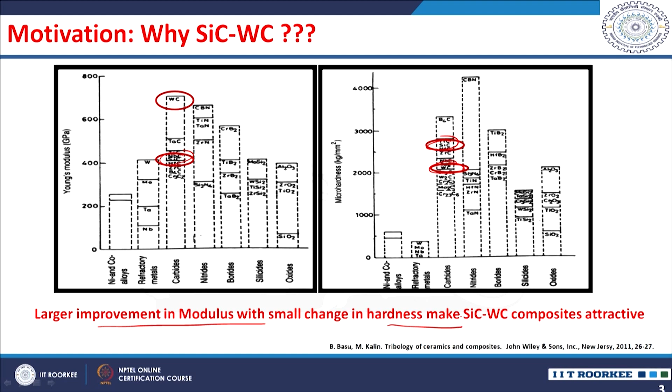As explained in an earlier lecture, silicon carbide is a ceramic material having a superior combination of properties, but these properties can be further improved by reinforcing with another phase. Among silicon carbide based ceramic composites, the Young's modulus of tungsten carbide is much higher than silicon carbide, whereas its hardness is slightly lesser than silicon carbide's hardness. So, if you have a silicon carbide tungsten carbide composite, we can expect an improvement in modulus with a small change in hardness. Such a composite will be attractive for several tribological applications.

However, our literature study indicates that such a material has not been studied for tribological behavior. Particularly, silicon carbide has higher hardness and oxidation resistance, whereas tungsten carbide has better strength and fracture toughness. So, the silicon carbide tungsten carbide composite is expected to exhibit improved properties under wear conditions.

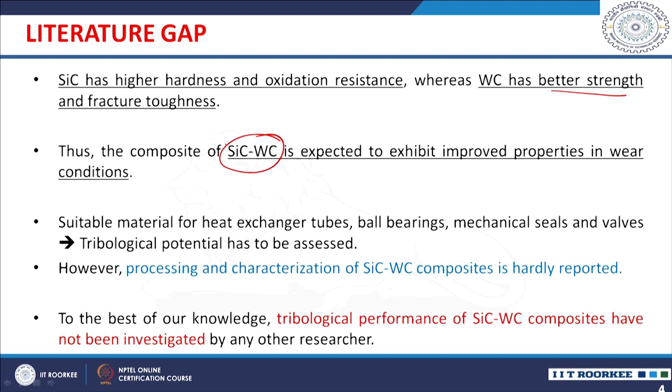However, the processing and characterization of dense silicon carbide tungsten carbide composites is a difficult task, so very few studies are reported for these composites. Particularly, dense silicon carbide tungsten carbide composite preparation is not yet reported, and the tribological performance of dense silicon carbide tungsten carbide composites has not been investigated by any other researchers.

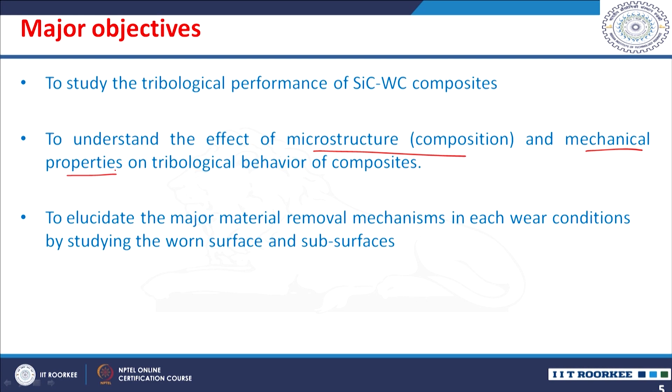In this context, the major objectives of the present study discussed in today's class are to study the tribological performance of silicon carbide tungsten carbide composites, to understand the effect of microstructure by changing the composition and mechanical properties on the tribological behavior of these composites, and particularly to elucidate the major wear mechanisms in wear conditions by studying the worn surfaces and subsurfaces.

These silicon carbide tungsten carbide composites were prepared at the University of Seoul with support from Professor Youngwook Kim. Four composites were selected for the present study, with varying tungsten carbide content from 0 to 50%: that is, 0, 10, 30, and 50% tungsten carbide containing silicon carbide ceramic composites, prepared with beta silicon carbide with a small amount of alpha silicon carbide, and aluminum oxide, yttrium oxide, calcium oxide as additive systems.

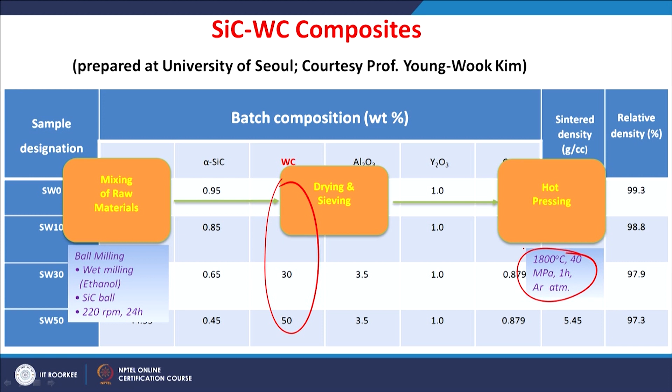These were prepared by hot pressing. Before hot pressing, the batch powders were mixed, dried, and sieved, followed by hot pressing at 1800 Celsius and 40 MPa for 1 hour in argon atmosphere. The sintered density of these materials is 98 to 99%.

The microstructure of these sintered silicon carbide composites exhibits almost equiaxed grains of silicon carbide, with very little presence of elongated grains. These almost equiaxed SiC grains decrease in size from around 830 to 550 nanometers with increasing tungsten carbide content from 0 to 50%.

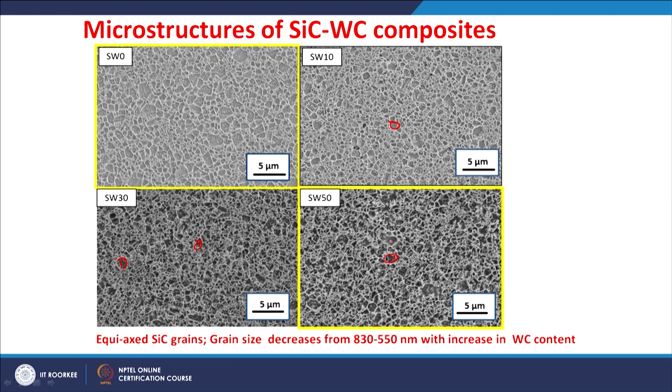With respect to tungsten carbide content, we see uniformly distributed tungsten carbide particles in the silicon carbide matrix, though certain agglomeration is present with larger amounts of tungsten carbide. The SiC with 50% tungsten carbide composite shows agglomerations of these tungsten carbide particles.

The mechanical properties were studied for these composites. Hardness increases up to 30% tungsten carbide, but slightly decreases at 50%, whereas fracture toughness improves from 5.85 MPa root meter to around 6.66 MPa root meter.

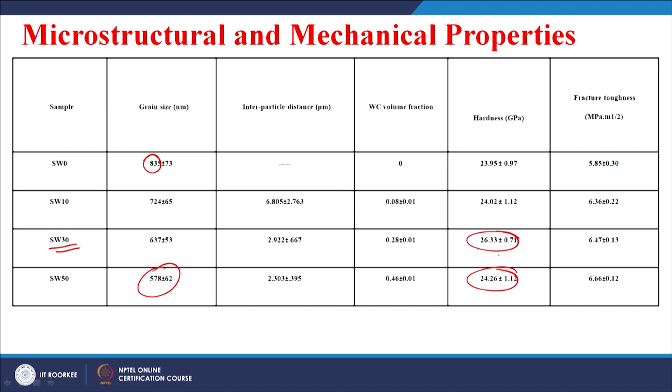Looking at the correlation between microstructural characteristics and mechanical properties, grain size decreased from 835 nanometers to 578 nanometers with increasing tungsten carbide content. Interparticle distance also decreased with larger amounts of tungsten carbide in these composites, indicating that grain growth during sintering was restricted by the presence of larger tungsten carbide content. This was reflected in the properties: hardness showed an increase for the silicon carbide 30% tungsten carbide composite, and fracture toughness continuously increased from 5.85 to 6.66 MPa root meter. This fracture toughness improvement is very important for any structural applications, so it needs to be studied.

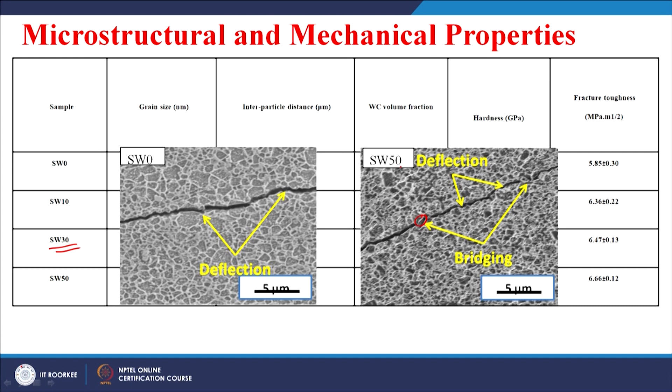After Vickers indentation, cracks propagate at the edges of the indents. When no tungsten carbide was added, the crack deflections are minimal, whereas the deflection and bridging are improved when tungsten carbide particles are present. These tungsten carbide particles improve the fracture toughness through bridging or deflection of the cracks.

With this material introduced, the tribological performance is systematically studied under two different sliding wear conditions: a unidirectional sliding wear study and a reciprocatory sliding study. In the unidirectional study, the counterbody influence on tungsten carbide content was particularly studied, whereas in the reciprocatory conditions, the temperature of the sliding test and the tungsten carbide content were particularly studied.

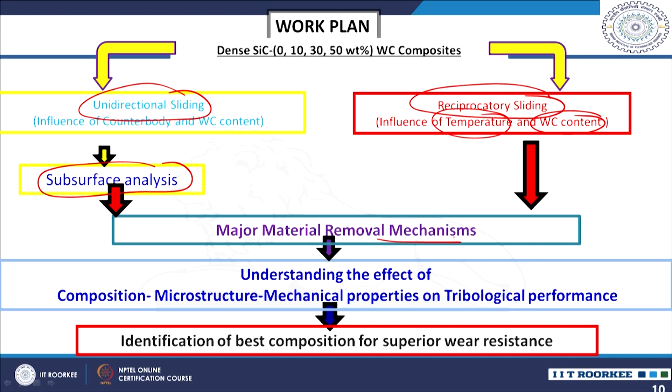In addition to the sliding wear behavior in unidirectional testing, major focus is given to subsurface analysis to find the origin of the material removal mechanisms. The major aim of this study is to elucidate the material removal mechanisms, so we can understand the relation between the composition of the composite—that is, tungsten carbide content variation—and how it reflects into microstructure, and how the microstructure influences mechanical properties and tribological performance. The study aims to understand the effect of composition or microstructure on mechanical and tribological behavior, and to identify the best composition for superior wear resistance.

Let us go through the salient results obtained in the unidirectional sliding wear studies.

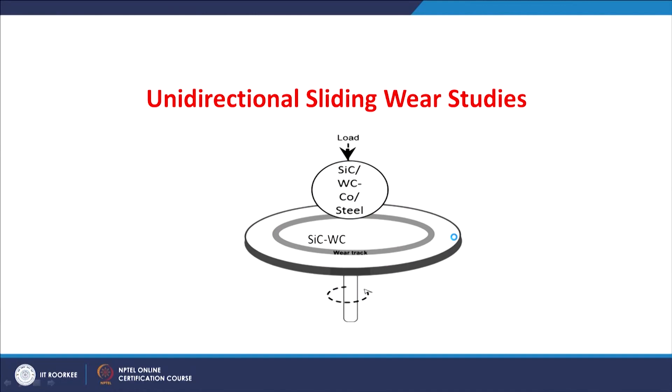Three different counterbodies were used: silicon carbide ceramic, tungsten carbide cobalt (called a CERMET), and steel. Three loads—5, 10, and 20 Newton—were applied with a combination of other parameters kept constant. For this, the ball-on-disc tribometer was used.

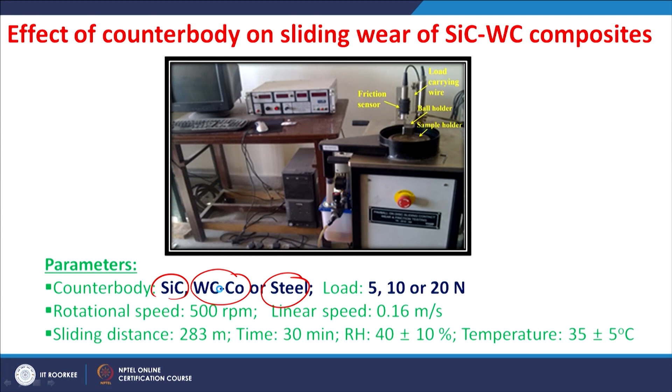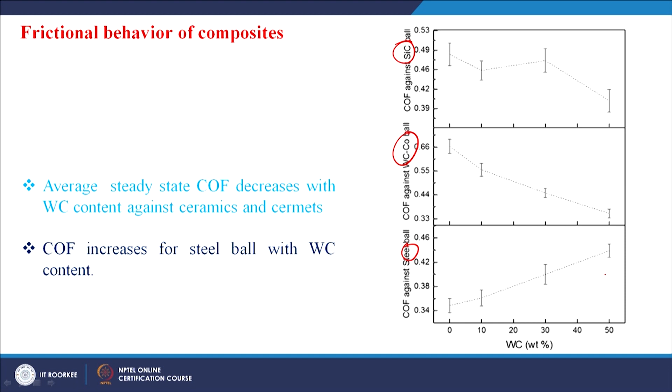The disc is the specimen, which is the silicon carbide-tungsten carbide composite, whereas the ball is changed from silicon carbide to tungsten carbide cobalt or to steel. Friction was measured and the wear was determined. The average coefficient of friction decreases against silicon carbide or tungsten carbide cobalt balls, whereas against steel it actually increases because the surface is changed at the contact. So there is a friction behavioral change.

Let us understand it further. When the wear volume was measured, as explained in the previous class, profilometry was used to read the surface profiles in a 2-dimensional way, and over a particular slide distance this was integrated to determine the wear volume.

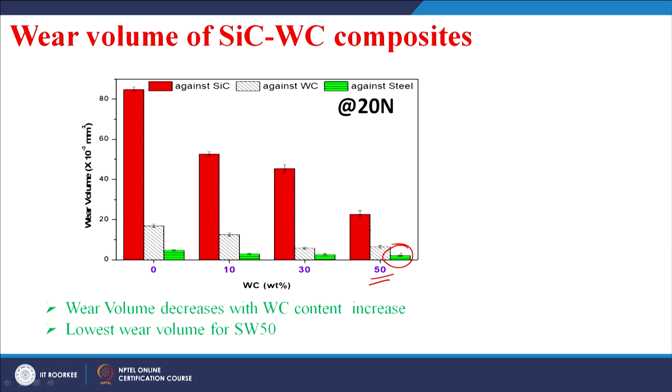You can see the wear volume of these composites having 0, 10, 30, and 50 weight% tungsten carbide content, tested against silicon carbide, against tungsten carbide cobalt, and against steel. The wear volume decreased with tungsten carbide content for any composite against any counterbody, with the lowest wear observed for the SW50 composite. Regarding the effect of counterbody, wear volume was highest against the silicon carbide ball and lowest against the steel ball, with tungsten carbide cobalt data falling in between.

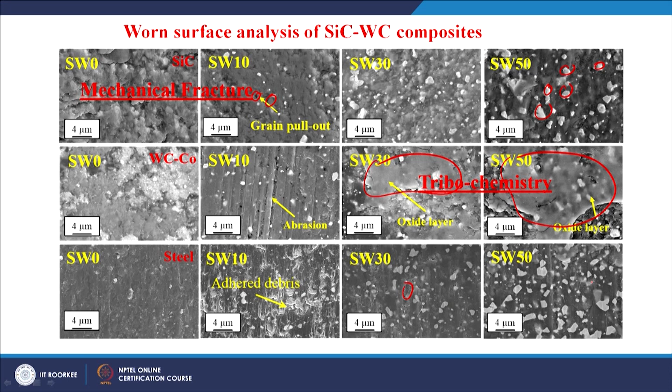As the tungsten carbide content is increased, you can see the presence of a particular layer. This layer dominantly covers the surface, particularly when you have the highest tungsten carbide content. But when you see the composite worn surfaces which were worn against steel, again they show debris and fracture and removal of these tungsten carbide particles. So there is a change from mechanical fracture to tribochemistry when there is a change in the tungsten carbide content or a change in the counter body.

To summarize the wear mechanisms against different counter bodies as a function of tungsten carbide content: abrasion and polishing is observed when you do not have any tungsten carbide content and worn against steel. When the tungsten carbide content is increased, you have adhered debris entrapped inside the grooves, and against tungsten carbide cobalt, this becomes severe abrasion with increased tungsten carbide content. But as the content is further increased to 30 or 50 weight percent, you see a compacted layer which adheres to the surface.

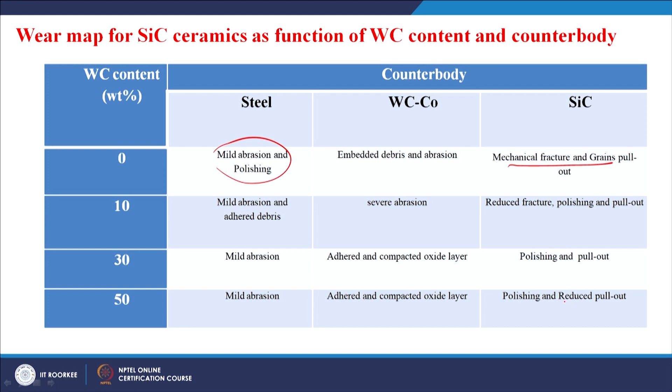Against silicon carbide, there is only grain pull out and fracture; only a change in the fracture is observed with increase in tungsten carbide. With an increase in tungsten carbide content, the fracture is reduced, it becomes more polished, and there is reduced pull out. To understand the actual mechanisms, we need to also study the counter body worn surfaces.

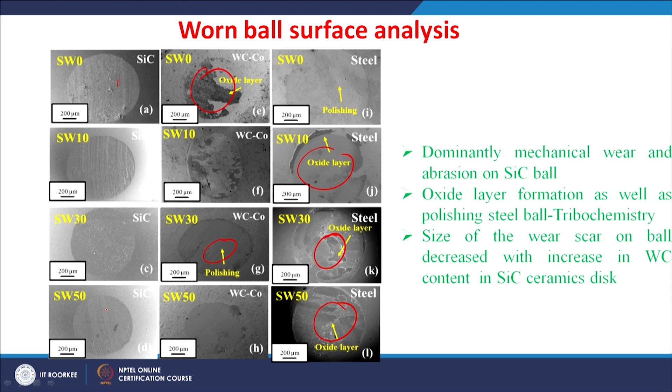Whereas oxide layer formation as well as polishing is observed against tungsten carbide or on the balls of tungsten carbide or steel. So the ball surface analysis shows the presence of tribochemistry on the tungsten carbide cobalt balls or the steel balls, whereas the silicon carbide balls do not show any tribochemistry. It is simply fracture, abrasion, and removal of material by fracture.

So in order to understand the chemistry difference on the surface against different counter bodies, Raman analysis was done, and it shows different products formed as debris. The debris against silicon carbide shows oxides of silicon carbide, oxides of silicon, and tungsten oxide. Generally when the harder counter body is sliding over the disc surface because of the harder indenting points...

So the material is removed and then subjected to oxidation in normal ambient conditions of sliding. You can see certain oxides also forming against tungsten carbide cobalt, including tungsten oxide, silicon oxide, and cobalt tungsten oxide debris. Against steel, in addition to these oxides, we also see oxides of iron and iron tungsten oxide.

So it indicates there is a chemistry difference in the debris formed when these composites were subjected to sliding against different counter bodies. The friction is more when these were worn against steel because of the presence of the harder oxides of iron or iron tungsten oxide, and these iron tungsten oxides are not present in the other conditions, so you do not have such an increase in friction.

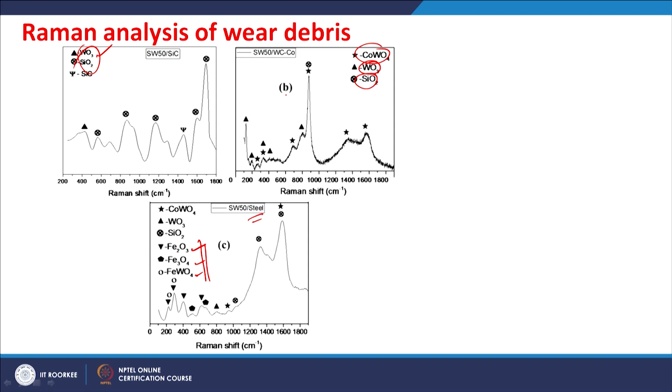Summarizing the silicon carbide ceramics: when you do not have any tungsten carbide, they just fracture by intergranular mode. This is the same against silicon carbide, tungsten carbide cobalt, or steel ball, with larger grains coming out as debris. When the silicon carbide contains some tungsten carbide particles, the composite shows a decrease in grain size, so the debris is also smaller. The fracture mode changes dominantly from intergranular to transgranular when you have tungsten carbide particles in a silicon carbide ceramic.

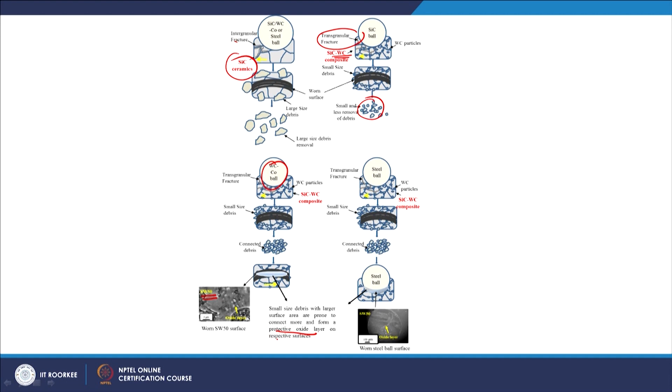Now, if you see the effect of the counter body against a tungsten carbide cobalt ball, these composites again fracture by the transgranular mode, but because of the finer size of the debris, and with the increase in tungsten carbide content in the composite, particularly SW50 or SW30, these smaller debris with a larger surface area are more prone to connect and form a protective oxide layer. So you get a decrease in wear.

In case of the steel ball, these composites again fracture by the transgranular mode, and the smaller sized debris connect with each other and form a layer, which is actually observed on the ball surface.

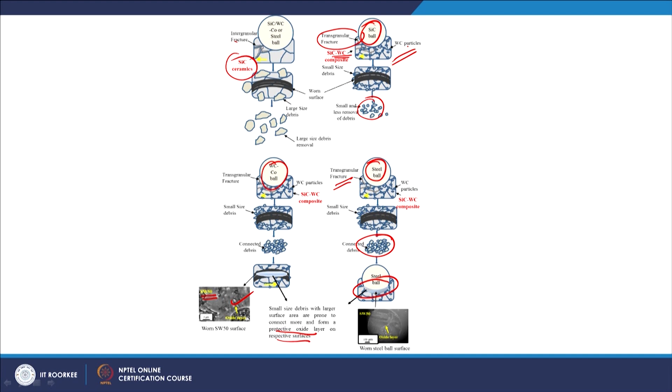The layer is observed either on the ball surface of the steel or on the disc which was worn against the tungsten carbide cobalt. They show certain layers, whereas such a layer is not observed when these composites were worn against silicon carbide. Against silicon carbide, it is purely fracture—the material is removed only by mechanical fracture and the resultant grain pull out.

So the major results from the unidirectional sliding wear study are like this. The coefficient of friction depends on the counterpart materials irrespective of their ball hardness. With increase in tungsten carbide content in silicon carbide ceramics, the coefficient of friction against steel ball increases, whereas it decreased for other silicon carbide or tungsten carbide cobalt ball.

Wear volume decreased with increase in tungsten carbide content, and the silicon carbide with 50% tungsten carbide composite exhibited minimum wear against any counterbody.

Regarding the major mechanism of material removal, against silicon carbide ball the silicon carbide tungsten carbide composites are worn by purely mechanical fracture with micro cracking, whereas tribochemical wear is dominating for the composites worn against tungsten carbide cobalt or steel ball. So there is a difference in the mechanism of material removal, and a difference in the friction and the wear.

This indicated very important information: when the silicon carbide tungsten carbide composites were subjected to different counterbodies, we have a different wear mechanism dominating. So that results into the performance difference.

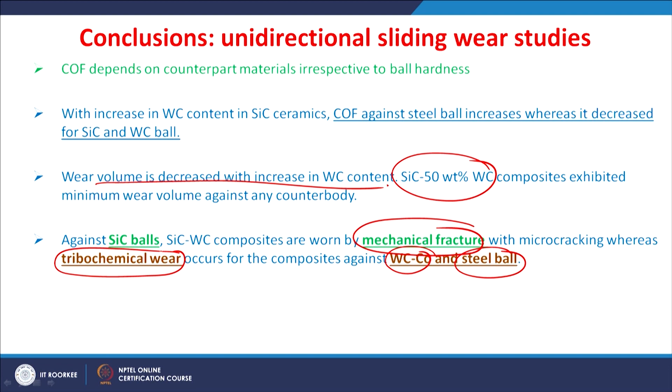Amongst the three counterbodies, when we use the silicon carbide counterbody, purely mechanical fracture is dominating. So it is very important to understand the origin of such a mechanical fracture.

So we selected these silicon carbide tungsten carbide composites worn against silicon carbide ball only, where there is dominantly mechanical fracture, for further studies of the subsurface analysis. The subsurface analysis study is very important to identify the origin of such a fracture.

So we purposefully did not take these silicon carbide tungsten carbide composites sliding wear studies against the tungsten carbide and steel ball, where there was a different type of tribochemistry.

So these subsurface analysis studies were possible with the support from Professor Amartya Mukhopadhyay of IIT Bombay.

We can see here the subsurface analysis was done by using a combination of focused ion beam with TEM analysis. Sample was cut at an angle of 35 degrees using a focused ion beam to observe the subsurface.

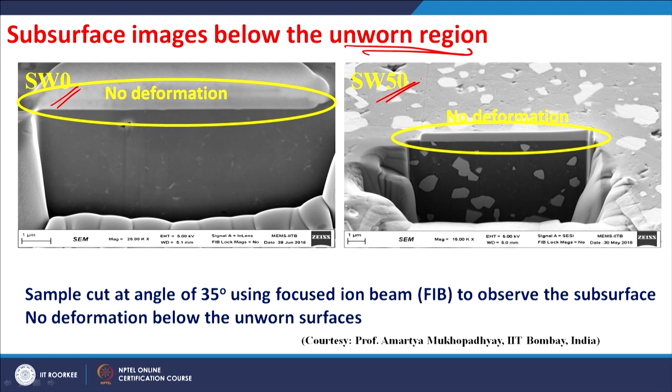The unworn regions of the sample do not show any deformation, whether it is silicon carbide without tungsten carbide or with tungsten carbide. There is no signature for any deformation, whereas when these composites were worn, you can see a lot of difference in the subsurface regions. When it is only silicon carbide, the damaged zone is around 1 micrometer; in case of composite, it is only 300 nanometers.

So there is a resistance against the damage at the subsurface when you go for the composite. In addition to that, we can also see several cracking signatures here.

Generally these ceramics show median and lateral cracks beneath the worn surfaces. It follows the classical linear fracture mechanics—when the hard and sharper contact slides over a surface, particularly the brittle surface, median or lateral cracks are generally found.

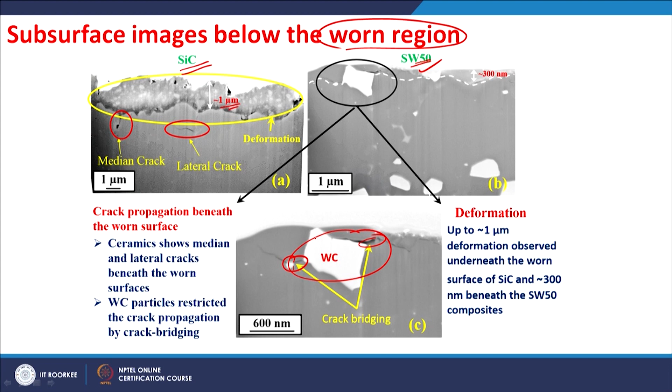But if you can see this difference between the subsurface images of the silicon carbide ceramic and the silicon carbide tungsten carbide composite, the tungsten carbide particles restricted the crack propagation by crack bridging. So this essentially shows there is a benefit when you go for a composite.

This can be illustrated schematically. The upper region generally has a plastically deformed region, and just below that you have a fracture region, characterized by cracking, whether median or lateral cracking.

When you have tungsten carbide particles, these particles result in crack bridging or crack deflection that improves the resistance against fracture. So you get lesser wear also.

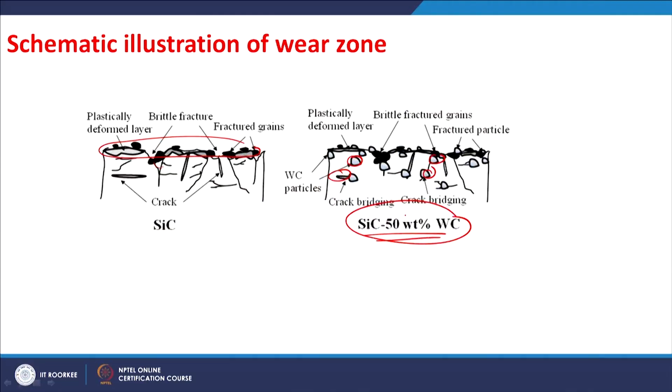So if you can recall, these silicon carbide tungsten carbide composites showed better wear resistance than the silicon carbide ceramic because of this resistance against crack propagation.

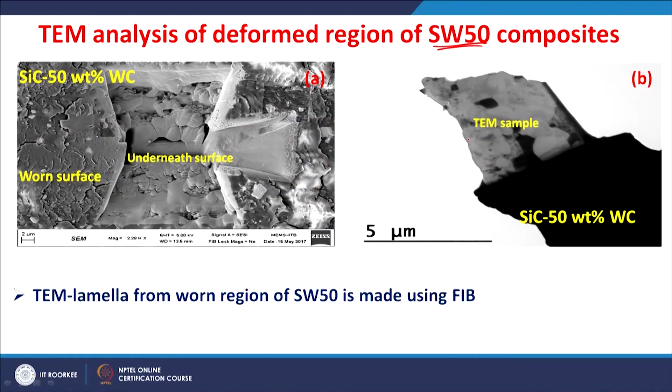To understand the origin of such behavior, TEM analysis was done on the deformed region of the selected composite. A TEM lamella was made from the worn region using the FIB, and this TEM sample was subjected to further investigation. This shows the silicon carbide grains and the tungsten carbide particles.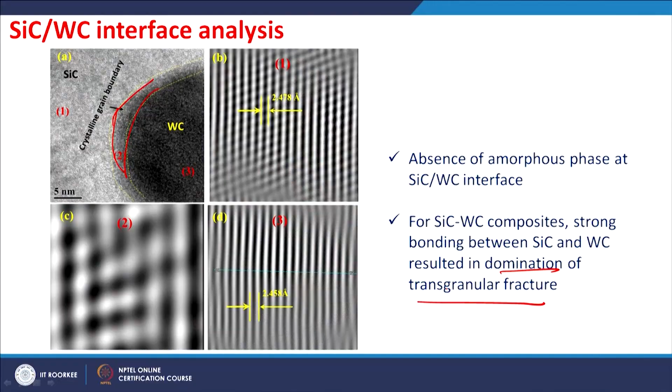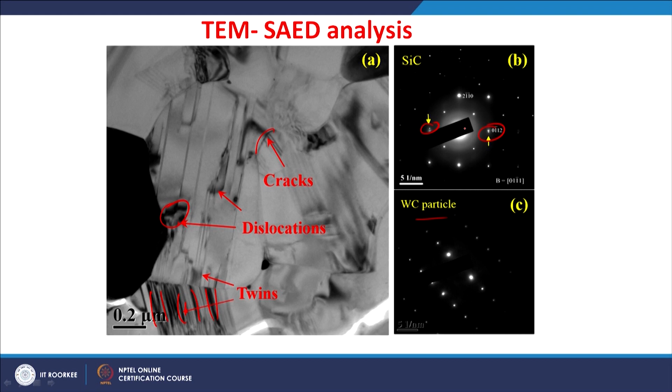Further, the selected area diffraction analysis also indicates the crystalline arrangement of the silicon carbide or these tungsten carbide particles. In addition, these worn regions, the regions underneath the worn surfaces, show the signatures of cracks as well as dislocations. In addition to these dislocations and cracks, we can also see lots of twins. The SAED pattern also indicates the presence of the twins. So the deformation is possible just below the worn region in terms of the dislocations as well as the twins.

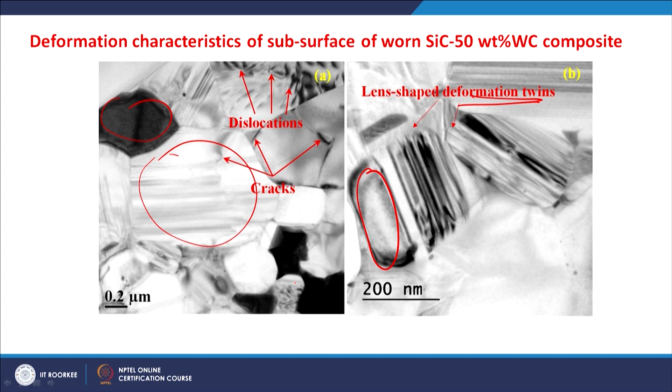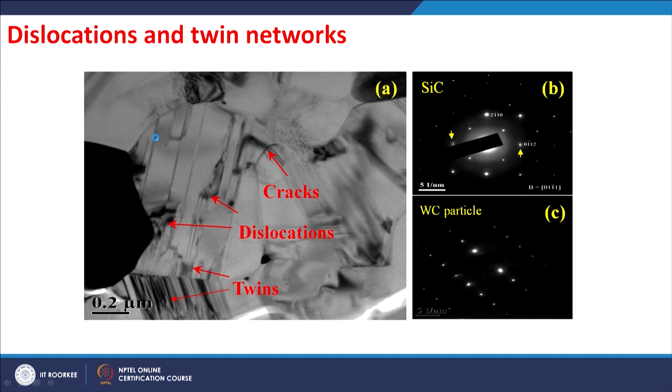As we know, silicon carbide ceramics have very few slip systems. It is quite possible the deformation happens by the formation of these twins. The shape of these twins indicates lens which indicate the deformation induced twins. So you can see on the grains of silicon carbide, the cracks and dislocations are present, whereas the dislocations do not present in the tungsten carbide or at the interface of this tungsten carbide with silicon carbide.

So concluding the subsurface study results, the deformation zones underneath the worn surface are larger for monolithic silicon carbide as compared to silicon carbide tungsten carbide composite. There are more or less 3 times more for the silicon carbide ceramics as compared to silicon carbide 50% tungsten carbide composite.

Micro cracks are observed below the worn region till 2 micrometer depth for monolithic silicon carbide ceramics. By contrast, the tungsten carbide grains are observed to bridge the cracks in case of silicon carbide tungsten carbide composite. The deformation zone underneath the worn region is comprised of a network of extensive dislocations and twins. So the stresses built at the tips of these dislocations or twins generate the micro cracks. You see lots of micro cracks in silicon carbide grains, whereas no deformation substructure is observed in the tungsten carbide grains, which also blocked the dislocations or twins at the interface. Therefore, the extent of deformation is limited to almost 1/3 what we observed here in case of the composite.

This particular study is very important in the sense that preparation of such a sample for TEM analysis, the sample must be taken from the region underneath the worn surface. So for that, FIB was used and then TEM analysis was done carefully, which revealed this information about the deformation zones, the cracking, as well as the beneficial effect of the tungsten carbide particles in the silicon carbide ceramics.

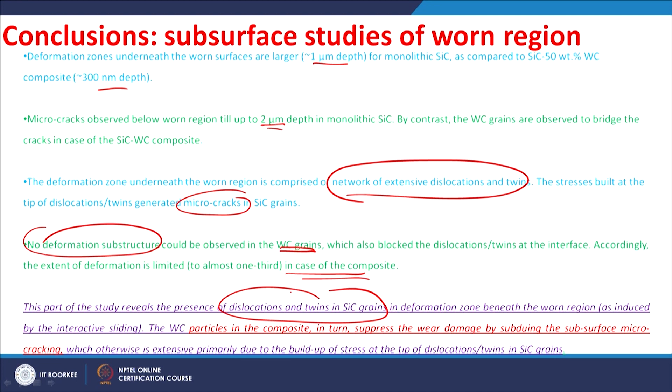So this particular study reveals the presence of dislocations or twins in the silicon carbide grains in the deformation zone beneath the worn region. The tungsten carbide particles in the composite in turn suppress the wear damage by subduing the subsurface micro cracking, which otherwise is found to be very extensive, mainly because of the buildup of stresses at the tips of these dislocations or twins in the silicon carbide grains.

So these stresses were developed because of the interactive sliding. The sliding induced stresses are responsible for the cracking. The cracking can be minimized when you use the tungsten carbide particles. That means a composite approach is very much beneficial in suppressing the wear damage by subduing the subsurface micro cracking.

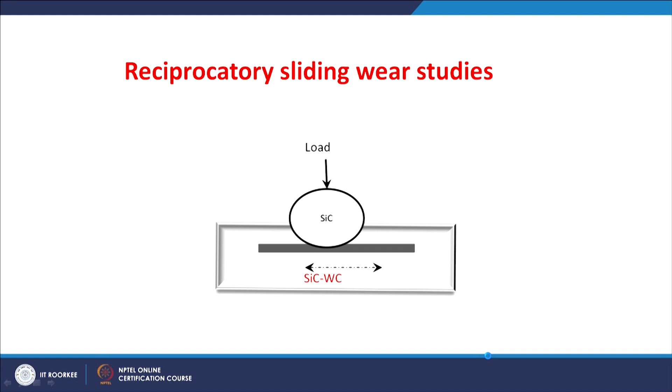Let us go to the last part of this lecture, the reciprocatory sliding wear studies. In order to understand the effect of the sliding mode from unidirectional to reciprocatory, we used a reciprocatory sliding wear test apparatus, where the ball was used as silicon carbide only and the load was changed from 6 to 19 Newton. These loads were selected to maintain similar levels of Hertzian stresses which were used in the unidirectional sliding test.

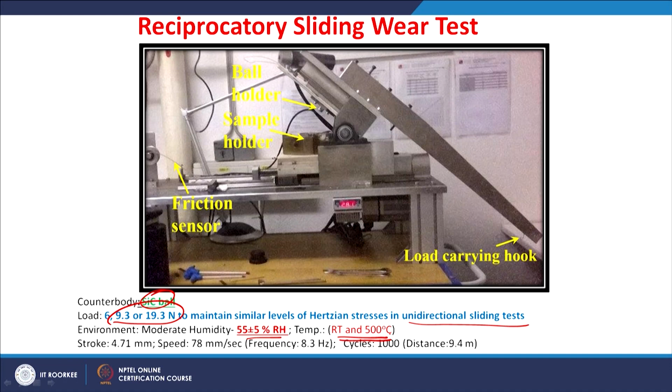So these were done in moderate humid conditions at two different temperatures, room temperature and 500 Celsius. So the major aim of this study is to understand the effect of the tungsten carbide content as well as the temperature of testing on the reciprocatory sliding wear behavior of the silicon carbide tungsten carbide composites.

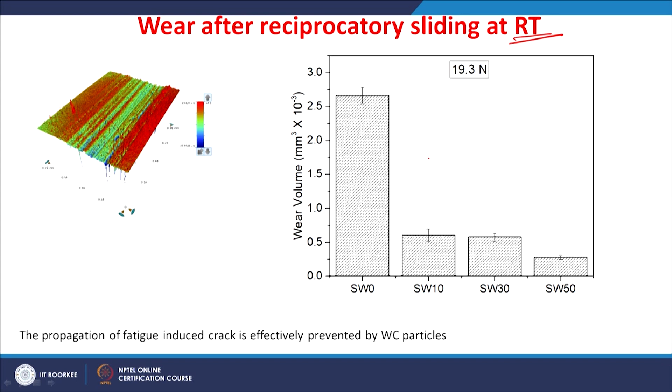Now you see the wear volume of the composites worn at room temperature. As tungsten carbide is introduced in the silicon carbide ceramics, the wear was substantially decreased. This means the reciprocatory sliding, which induces fatigue-induced cracks, is effectively prevented by the tungsten carbide particles. This study was selected to understand the behavior of these composites in reciprocatory sliding.

In reciprocatory sliding, we have a difference in the contact time of this debris, so it will affect the properties or performance. If you look at the silicon carbide tungsten carbide composites after sliding in reciprocatory mode at room temperature, the surfaces show micro cracks and pull-out of the tungsten carbide particles, but with increase in tungsten carbide content, the fracture was minimally reduced.

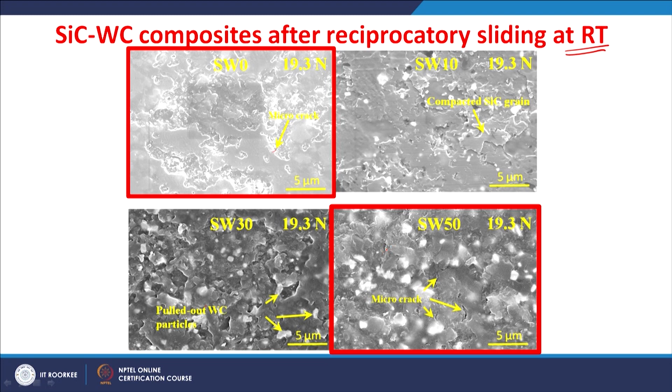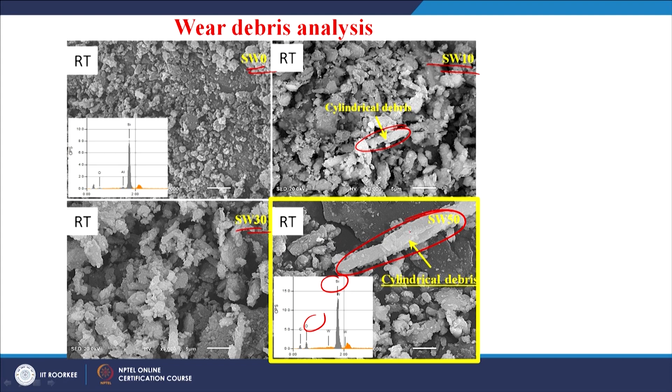The debris analysis particularly shows the presence of cylindrical shaped debris. EDS analysis shows these are oxides of silicon. As the tungsten carbide content increased, you get finer debris as well as the presence of cylindrical shaped debris.

This information is very important to analyze the unidirectional reciprocatory sliding wear test results. In case of silicon carbide ceramics without tungsten carbide, the wear rate was more or less the same whether unidirectional or reciprocatory, but as the tungsten carbide content is increased, you get a reduction in the wear rate in the reciprocatory sliding wear test. That indicates the effect of longer contact time for the finer debris particles.

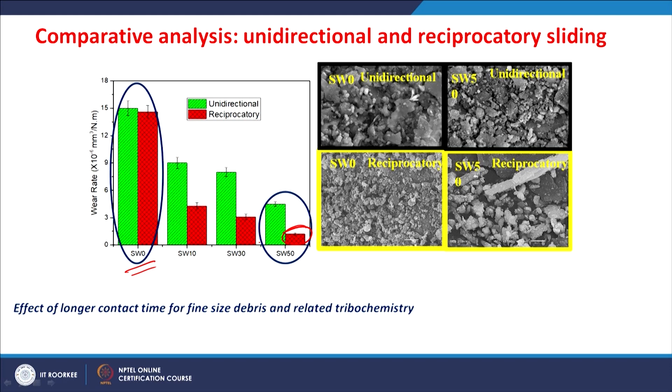These finer sized debris connect with each other and tend to form cylindrical debris. The cylindrical debris generally facilitates easy sliding, and forms only when there is a viscous surface. This viscous surface layer is because of the interaction with the silicon oxide present on the silicon carbide particles, or present due to these wear tests.

This silicon oxide reacts with moisture and forms silicon hydroxide. The silicon hydroxide particles connect with each other and form cylindrical debris. So the viscous surface is removed from the composite and the debris connect to each other and form a cylindrical shape.

There is a tribochemistry when the sliding test mode was changed from unidirectional to reciprocatory. In unidirectional it is mechanical fracture only, whereas in reciprocatory there is a signature of tribochemistry involved.

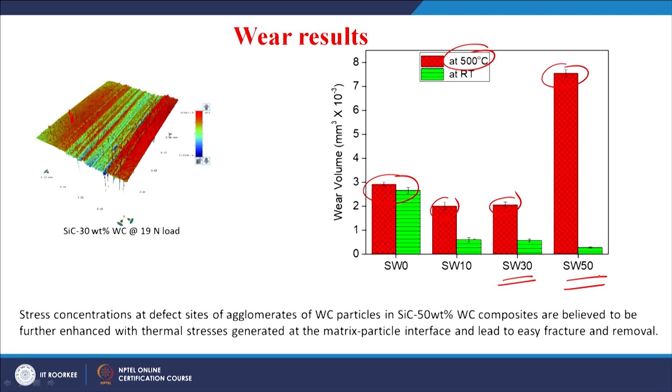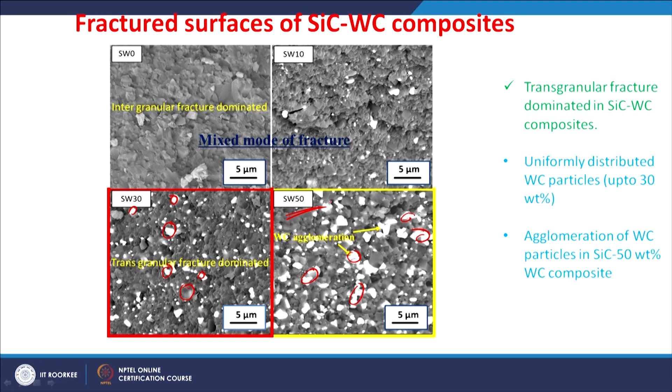The stress concentrations at the defect sites of these agglomerates of tungsten carbide particles, particularly in the SW50 composite, are believed to be further enhanced with thermal stresses generated at the interface of the matrix and particle. This leads to easy removal of material, so you get a larger wear volume when tungsten carbide was around 50%.

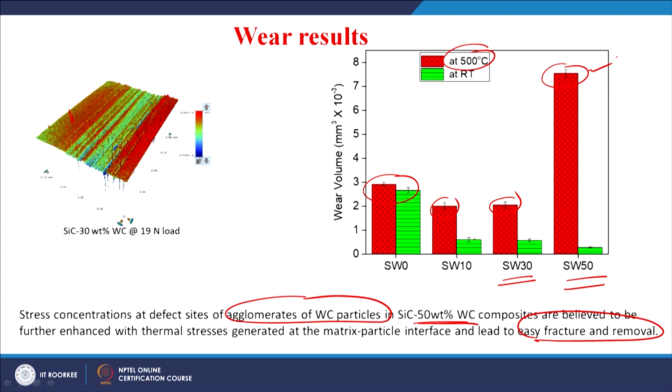The silicon carbide tungsten carbide composite surfaces after reciprocatory sliding at room temperature and high temperature of 500 Celsius show a difference in mechanism. The fracture is increased when testing was done at higher temperatures.

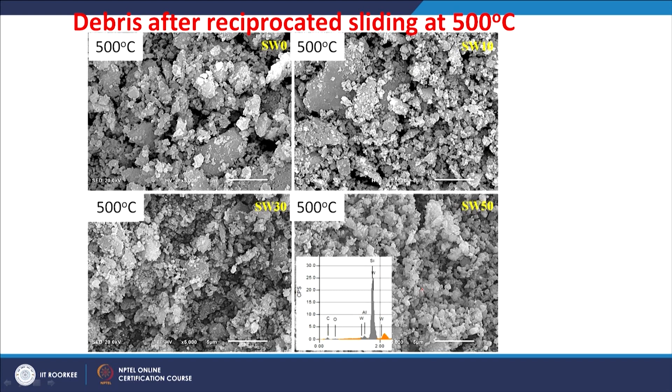At room temperature, as tungsten carbide content is increased, we see certain tribochemical layer formations and removal, whereas such tribochemical layer formations are not found in composites worn at high temperatures. The debris also show no presence of any cylindrical shaped debris - these are all fractured grains with no signatures of tribochemistry.

We also validated the experimentally measured wear volume with the wear volume determined using a lateral crack model. Since fracture dominated for the silicon carbide tungsten carbide composites at higher temperatures, the experimentally measured wear volume is in linear relation with the wear volume determined using the lateral crack model.

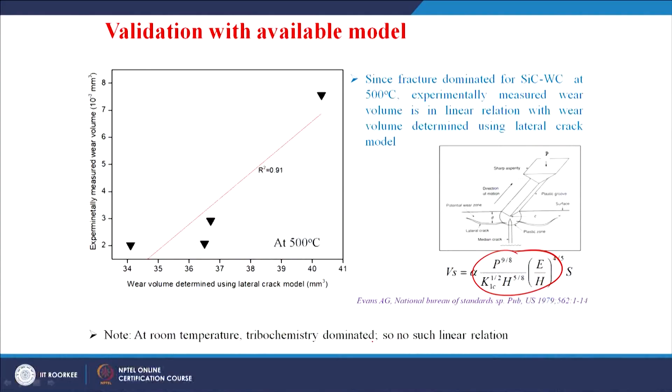But at room temperature, because tribochemistry was dominated, no such linear relation is observed. This also indicates mechanical fracture at higher temperatures, whereas tribochemical wear occurs at lower, room temperatures.

Concluding these results from the reciprocated sliding wear studies, increased tungsten carbide content resulted in reduction in friction and wear in ambient reciprocated sliding conditions, with the generation of cylindrical debris.

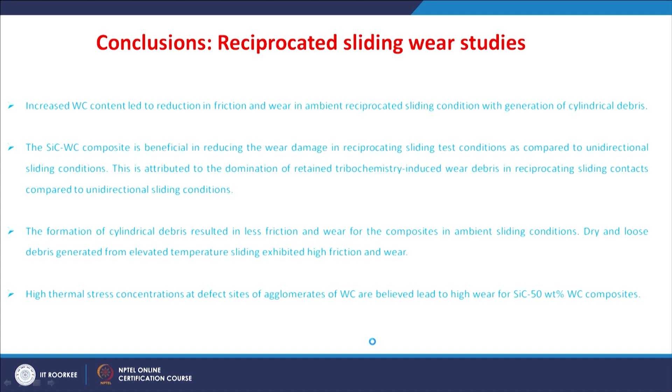So, cylindrical debris formation is observed only in the ambient conditions. The silicon carbide tungsten carbide composite is beneficial in reducing wear damage in reciprocated sliding test conditions as compared to the unidirectional sliding test conditions.

This observation is attributed to the domination of retained tribochemistry induced wear debris. Because of the longer time for the debris in contact, the tribochemistry induced wear is much retained, so in the reciprocated sliding conditions it is much more beneficial.

The formation of this cylindrical debris resulted in lesser friction and wear for the composites in ambient sliding conditions, whereas dry and loose debris generated from elevated temperature sliding conditions resulted in high friction and wear. High thermal stress concentration at the defect sites of the agglomerates of tungsten carbide particles are believed to lead to higher wear when there is a larger amount of tungsten carbide content.

So, this study indicates the influence of the sliding mode, the influence of the tungsten carbide content in the silicon carbide tungsten carbide composite, and the influence of the temperature.

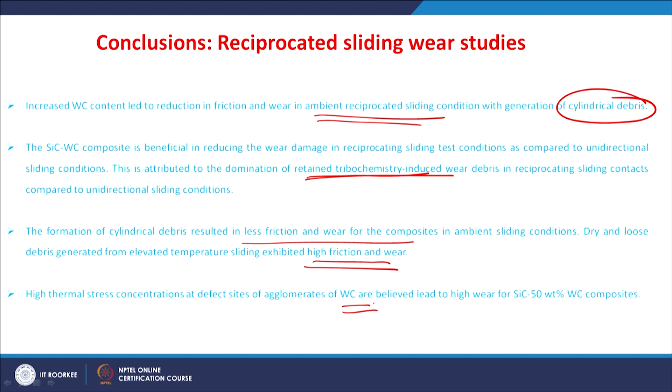With respect to tungsten carbide content, the silicon carbide tungsten carbide composite is always beneficial in reducing wear damage in reciprocatory sliding conditions, as the fatigue induced crack is deflected or bridged. So the removal of material by fracture is reduced, giving a benefit in the silicon carbide tungsten carbide composite.

So, finally summarizing, we have gone through the salient results obtained in the tribological study at different length scales for the silicon carbide tungsten carbide composites.

We found wear decreased when tungsten carbide content is increased in unidirectional sliding conditions as well as reciprocatory sliding conditions, whereas mechanical fracture is found against silicon carbide ceramic ball in unidirectional sliding conditions, and tribochemical wear dominates against tungsten carbide, cobalt, or steel ball.

In reciprocatory sliding conditions done with silicon carbide against silicon carbide ball only, they again showed enhanced tribochemistry. You can see the mechanical fracture against silicon carbide in unidirectional conditions changed to tribochemical induced wear at room temperature for these composites, whereas at higher temperatures again the mechanical fracture is dominant.

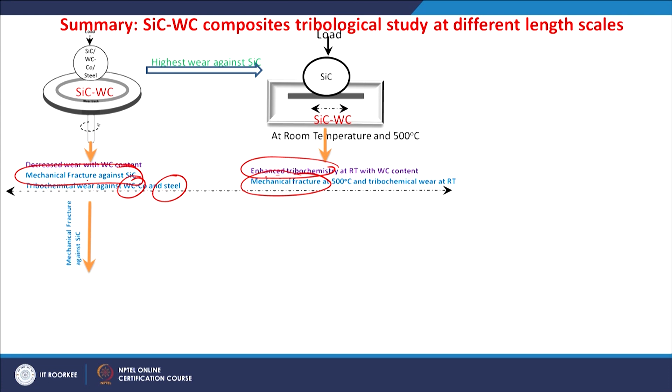In order to understand the origin of material removal, we selected the silicon carbide tungsten carbide composites for study in subsurface regions. We selected the composites worn against silicon carbide only, because it is only mechanical fracture, there is no tribochemical layer, so it is easy to understand the origin of material removal from beneath the region.

So, subsurface study indicates the plastically deformed region as well as the cracked region, and the presence of tungsten carbide is always beneficial in reducing wear by crack bridging and crack deflection, so that the fracture is reduced and the wear is reduced.

Beneath the worn region, the silicon carbide tungsten carbide composite shows lesser propagation or reduced propagation of cracks because of the tungsten carbide particles present.

Further analysis by TEM shows the origin of the wear occurs by cracking. The cracking is possible by the stresses induced by sliding at the tips of deformation signatures like dislocations or twins, and these cracks will propagate further and lead to material removal.

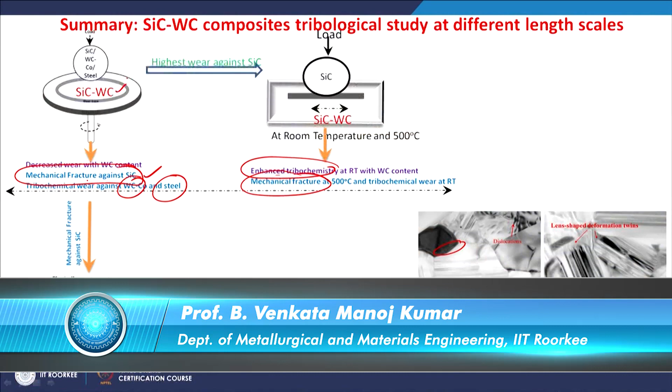So, this study was taken to understand the tribological behavior of these composites at different length scales, from the worn surface to underneath the worn surface. Particularly underneath the worn surface, the study was done to identify the origin of the wear. So, thank you, we will continue this in the next lecture.